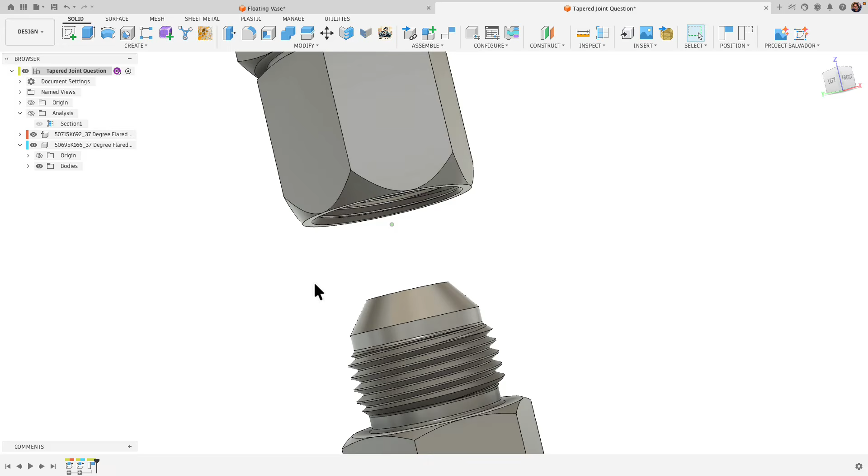I wanted to do a follow-up video on the last tutorial I did on aligning chamfered faces because I got some really good comments there and suggestions on alternative ways to go about it. So I wanted to try those methods here that were mentioned in the comments.

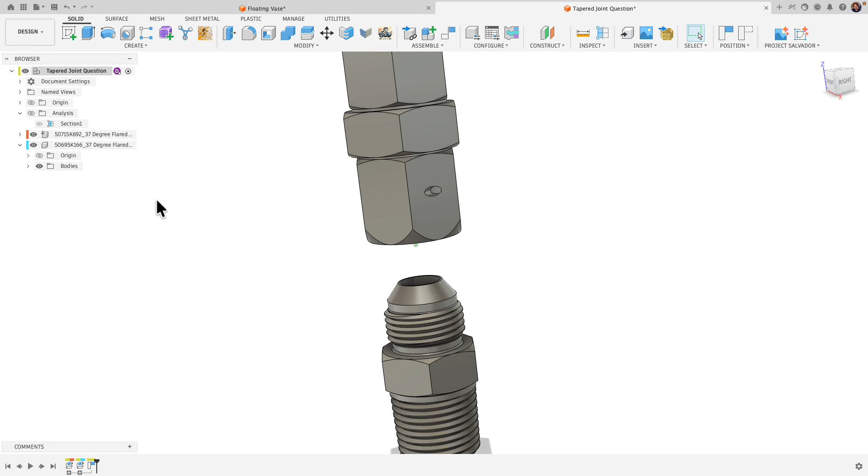So just a quick summary, I've got these two fittings here. They're hydraulic fittings. And I want to be able to align them so that this chamfered face here will come in and connect to this one. So once they're threaded, to give me the exact distance these come in contact.

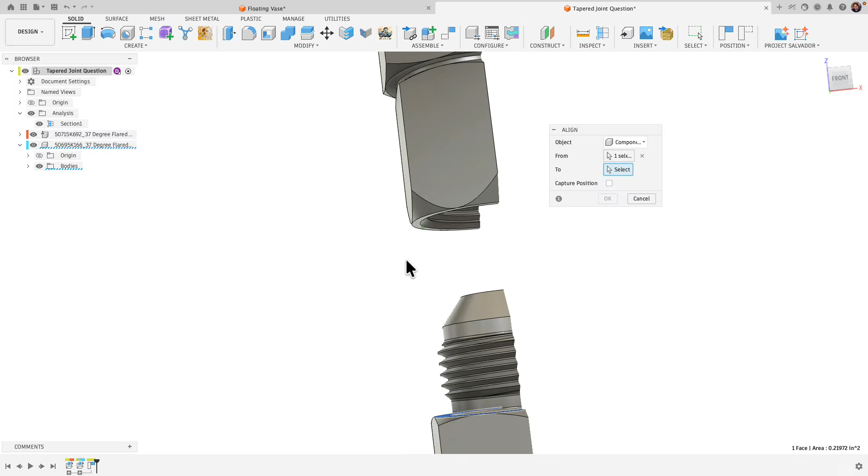So it may seem like a simple problem, and normally it is if you have flat faces, because if I go to modify align, I can take, for example, this flat face and connect it to this flat face. And then boom, you're done. But it's a problem with these chamfered faces because if I try to do that same alignment tool, one, if I go to select it, you can see I've got multiple selection points. I could do the bottom, the middle, or the top, depending what I want to reference.

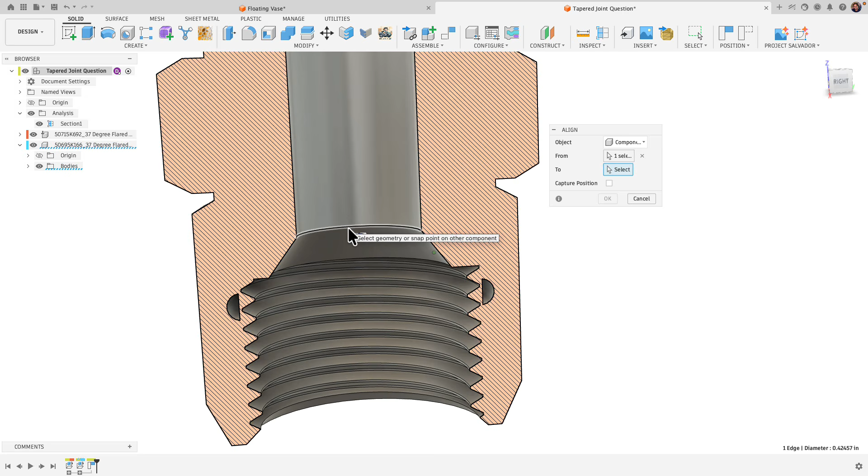But no matter which one I choose, for example, I'll do the top to the top of this chamfer here, click OK. You can see we get an overlap there. So it doesn't align it face to face. It wants to align it to either match this bottom edge, the top edge, or the middle. So it doesn't really work out that way.

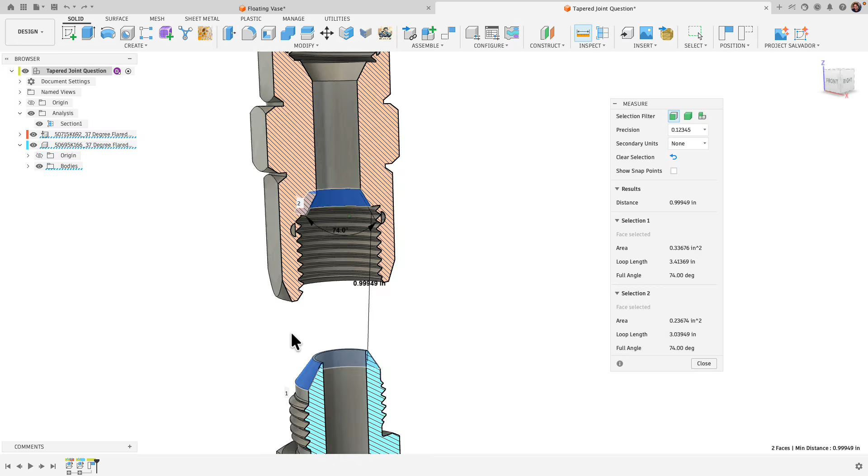And if I grab my inspect tool and try to measure between these two faces here and get a measurement and then move it, the problem is Fusion gives you a distance that goes from the top edge to the bottom edge, and it's also an angled distance, so it doesn't really help. All right, so just a quick recap of the problem there.

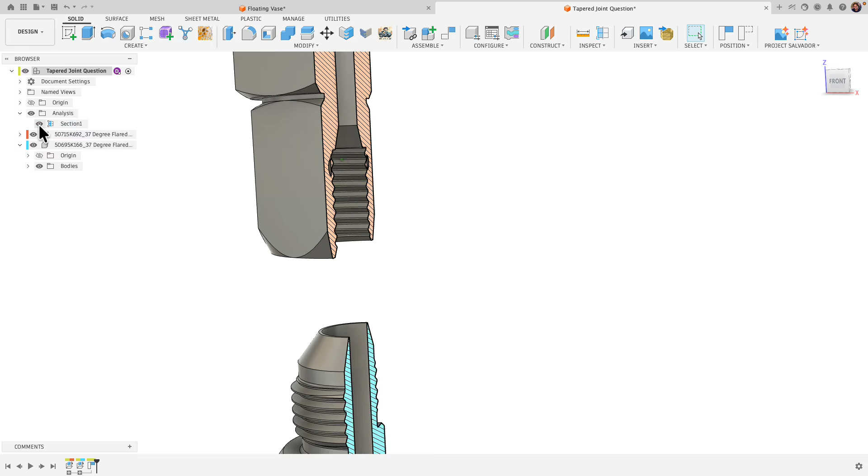If you look in my previous video, I show how you can use the contact sets tool in Fusion that allows you to move both components, and Fusion will automatically stop them once there's a collision, so you can get that perfect alignment that you need. All right, so now with this video, I wanted to address a few of the comments there. So a couple of them that I wanted to look at.

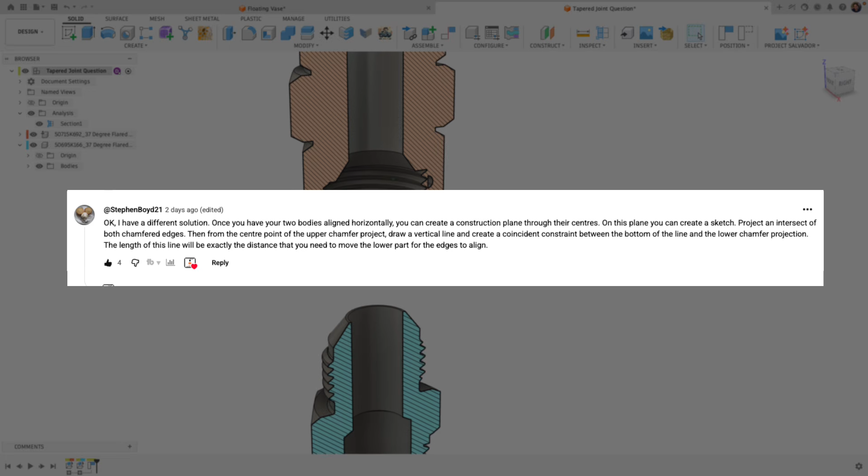The first one is by Stephen Boyd 21, who has a really good solution here. And it's one of those that once I read it, it's kind of like, wait, why didn't I think of that? So with this solution, Stephen basically says, align the bodies horizontally and then create a construction plane, do a project intersect, and then project the chamfered edges, and then you can measure the distance. So let's go ahead and give that a shot here.

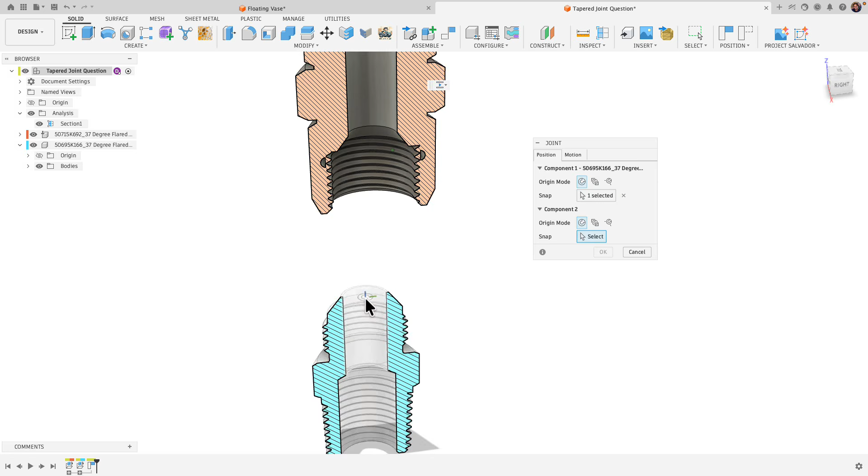So basically the first thing we need to do is align these to be vertical. A couple ways we can do that. We can either do a joint or a constrained components. In this case, I'll just go ahead and do a joint. Let's do a slider joint, and I'll just say center of this cylinder to the center of this one. Just referencing those edges, click OK.

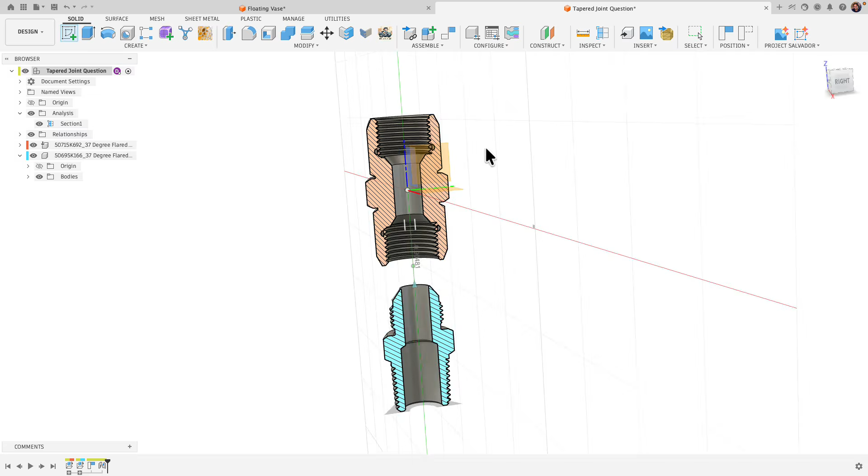And now that's perfectly aligned. I can move that up and down. Where I move it doesn't matter. So right now I'm just gonna pick a position and then take a measurement. To do that, I'm gonna follow Stephen's steps here. I'm gonna create a sketch. I'm on the right plane here. So let's go ahead and choose that plane, capture position.

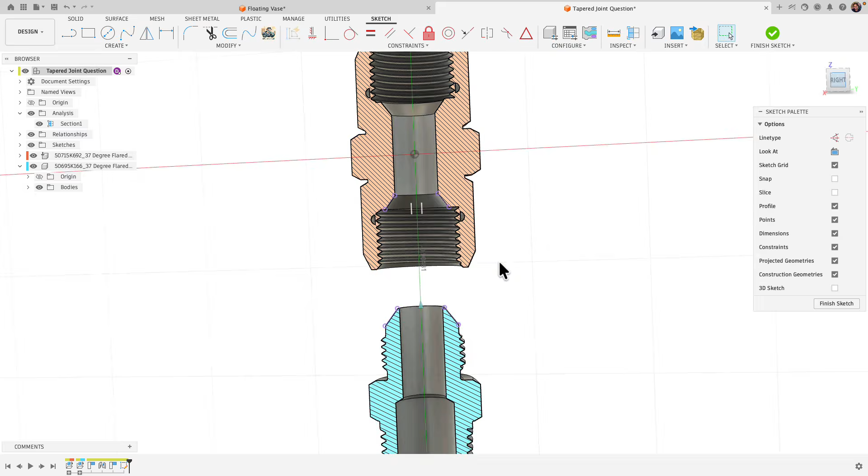And in here, we're gonna go create, project, include, intersect. And I'm just gonna choose these chamfered faces here and click this one and this one here. And note that in my dialog box, I have selection filters set to specified entities. Click OK. All right, let's go to the right view. I'm going to untoggle the bodies here, and I end up with these projections.

All right, so he says go ahead and create a line. So L for line. I'm going to go from what he suggested was the midpoint there. Go straight down and then grab a coincident constraint. Click it on the end of that line and then the projected edge there. And then go ahead and take this measurement here. In this case, I have 1.00628. Click to copy it, close.

All right, so what I got to this point, a couple of things I was thinking about was, well, why does this have to be the midpoint? Because he specifically mentioned midpoint. And I think he was just making sure that when you do select a point here and you go straight down, you'll actually be able to hit this bottom chamfered projected line there.

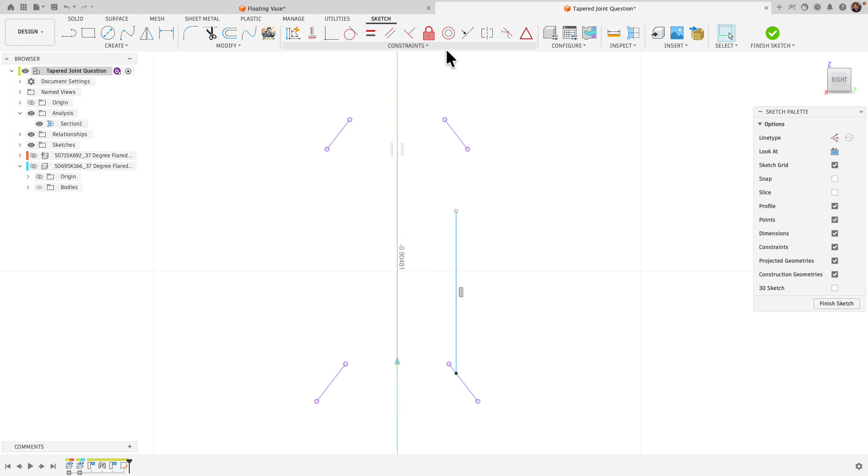Because if I delete the midpoint, and I have this line here, I can just create another coincident constraint here between the endpoint of this vertical line to the chamfered projection there. And no matter where I move this up or down, I could in fact go away from the line, because that coincident constraint will still pretend that line actually keeps going. And you can see here, if I go ahead and measure that line, it's going to be that same distance. So I just wanted to show that really you just need this to be coincident to both lines.

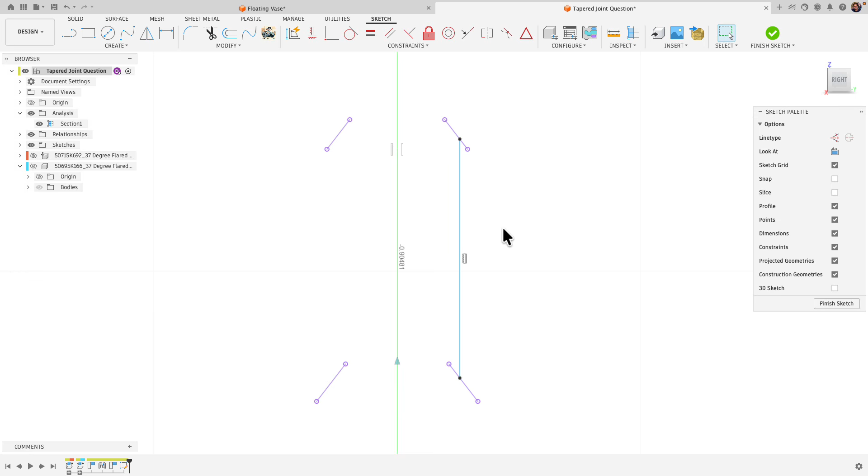All right, we've got that measurement copied to our clipboard. We're going to click Finish Sketch, and then I'm going to bring in these components here, and let's go ahead and do a move. So right click, move copy. I'm going to click on this bottom component, and then I'm just going to paste it in the Z direction, and then click OK. See that 1.00628, zoom in, perfect alignment there.

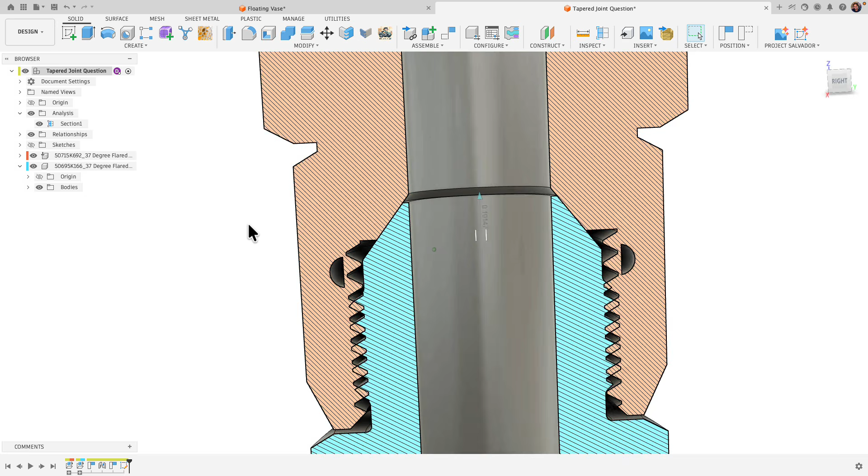And then we can take a measurement from flat surfaces as we did last time here. So click on inspect, bottom to the top here, distance 0.01229. And just as an aside, you can actually change how many significant figures you get here.

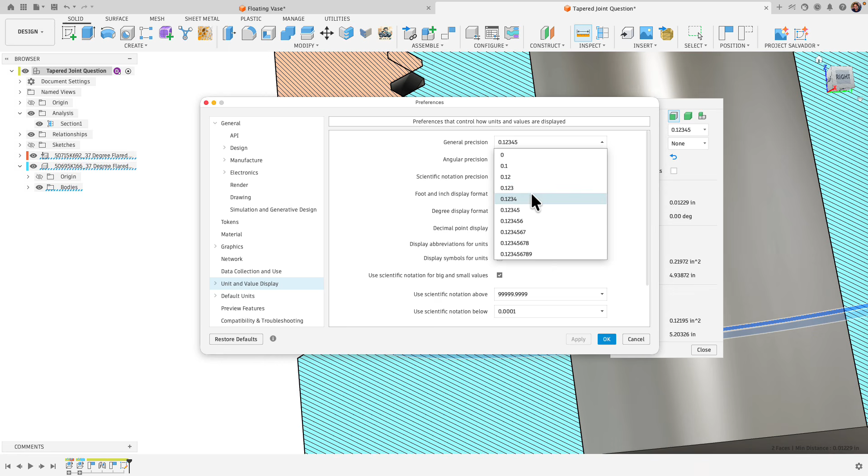If you go up to your preferences, go to your units and value display here, and you can see in your general precision, you can change how many significant figures you want to show. So if I change that to 3, click apply, okay, and let's go ahead and retake that measurement. That will go ahead and display it in the right significant figures you need. All right, just thought I'd show that.

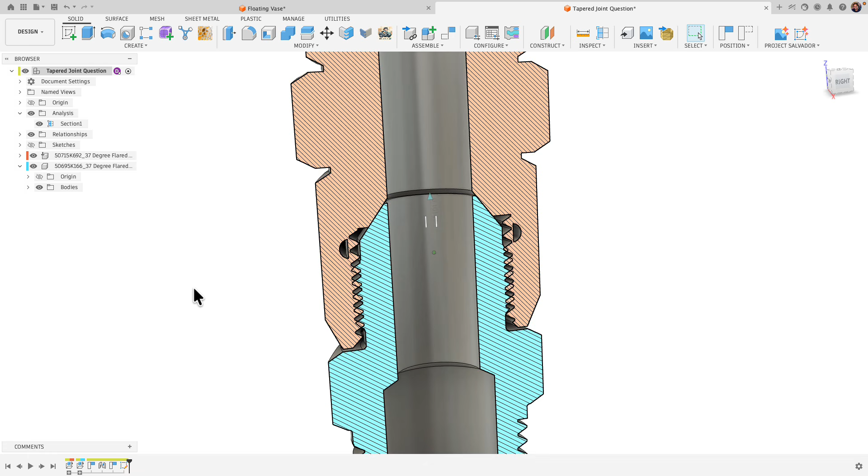All right, so really great solution here by Stephen Boyd. So a big thank you to Stephen for commenting and showing this method that I wasn't even thinking about. Okay, so I'll show another solution here that I thought was also a really good one. And that one was from Kristian Laholm.

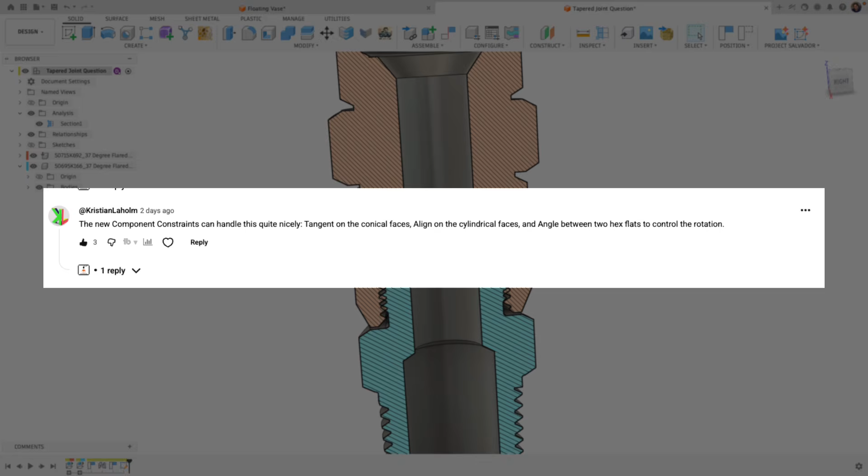So the solution he says here is the new component constraints can handle this quite nicely. Tangents on the conical faces, align on the cylindrical faces, and angle between two hex flats to control the rotation. So let's give that a try. All right, so here he mentions using the constrain components, which is a relatively recent addition that Fusion did that gives you another option to align parts instead of having to only rely on joints.

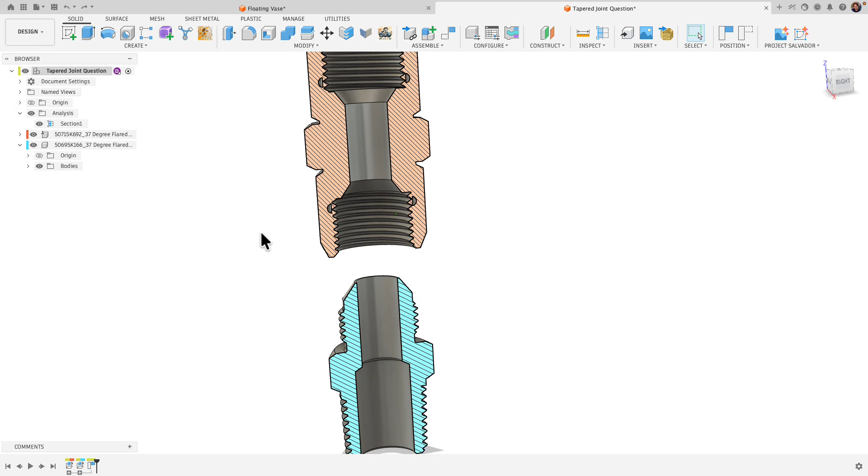So I'm going to go ahead and just delete the last couple timeline features here. So we have this now freely moving, no joints applied. And let's give this a shot. So the first thing he suggests is go to assemble, constrain components, and he says tangent on conical faces. So if we open our dialog box here, we have align, angle, center, and tangent.

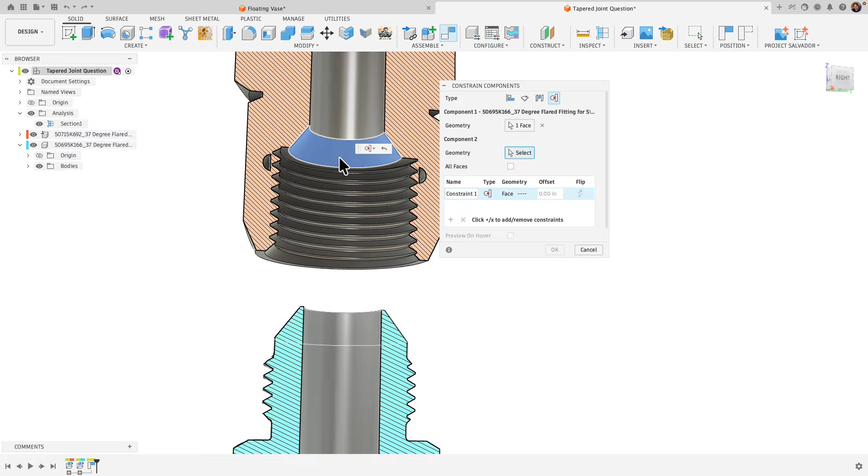I'm going to click tangent, grab the conical faces here, one, and then the inside one here. And all right, so it just disappeared on me. And I actually had tried this attempt and it wasn't working for me. I'll show you why it disappeared. If I untoggle analysis here, you can see that it moved away from that section plane. But we get this weird situation here where this is moving.

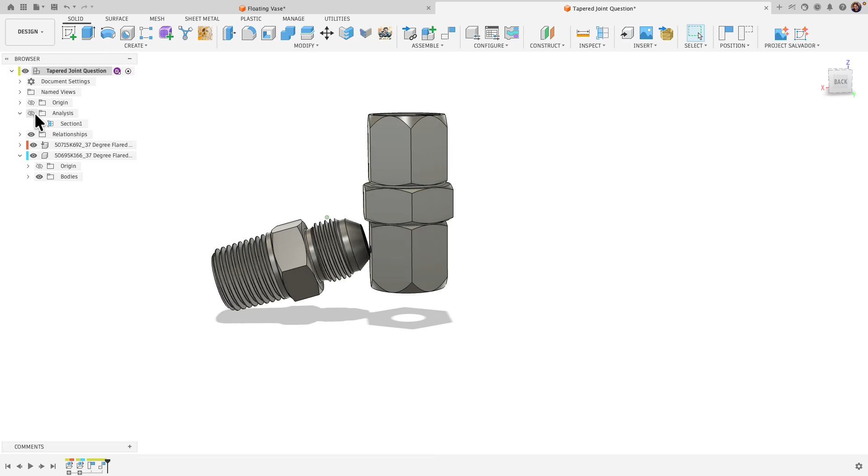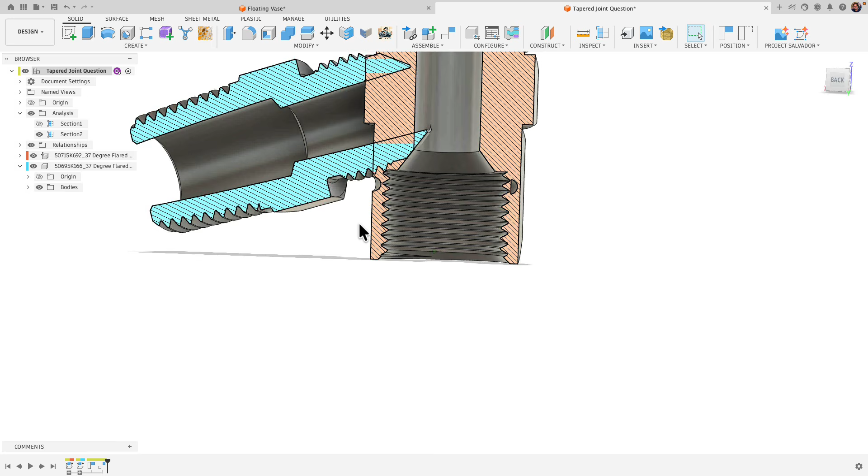I can't see it from this view, so I'm gonna have to create a new section plane here so we can see it. So let's go ahead and go to inspect, section analysis. Let's choose this plane here. Click OK, and you can see what it's trying to do is it is aligning it, but it's aligning the outside of the faces. So if you follow this face here, it's trying to align it to the outside of this chamfered face here.

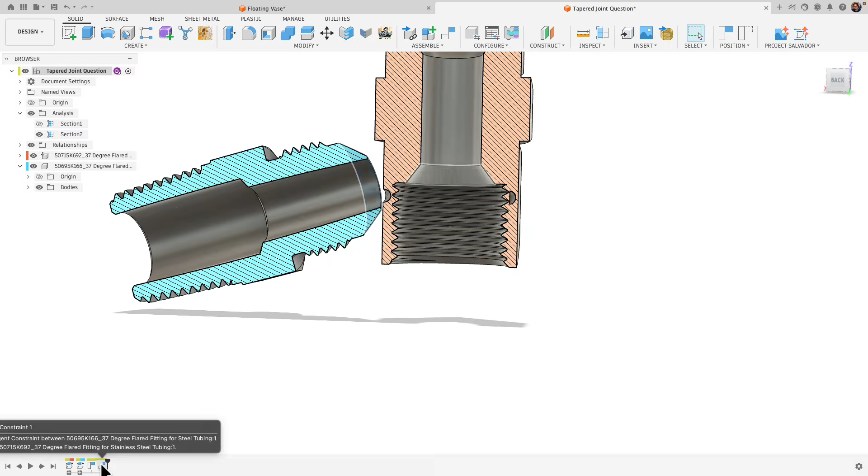And so I did get stuck on this and I wasn't able to get it to work. And I was about to write Kristian back and say, can you explain this? Because it's not working for me. But then I realized if you open this dialog box here, you have an option to flip the edge here. So if you hover over it, it says flips the orientation of the selected geometry.

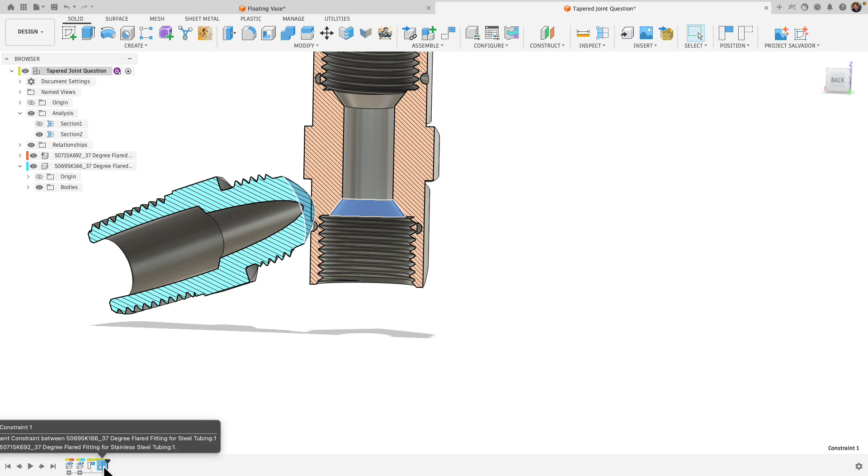So if I click to flip it and then click OK, that doesn't quite work. It flips back. I kept playing around with it and I realized order of operations is important here. So let me delete that. Let me just go back to where we kind of started. So I'm undoing, go back to here. This is not constrained at all, it freely moves.

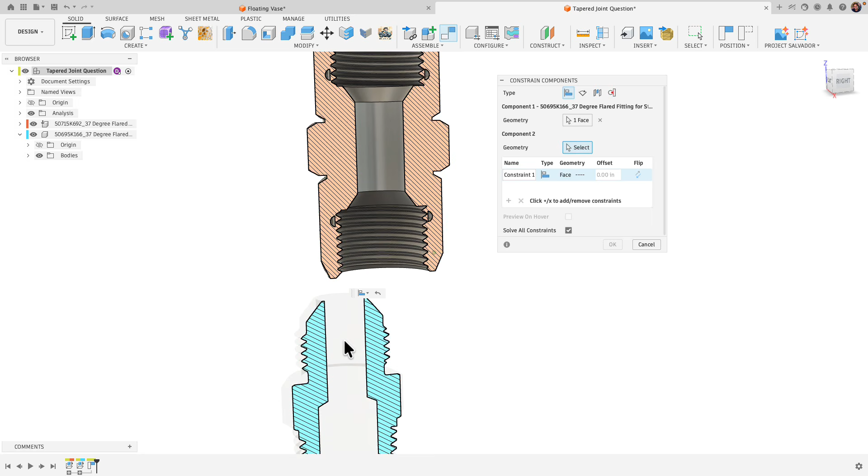Let's go back to assemble, constraint components. And first I'm gonna start with an alignment here. So we're gonna do a vertical alignment. I'm gonna click on this interior face here of the cylinder and align it to the top component. Click OK. Now you can see that has a similar effect as when I put that slider joint. So this is constrained to move straight up and down in the central z-axis here.

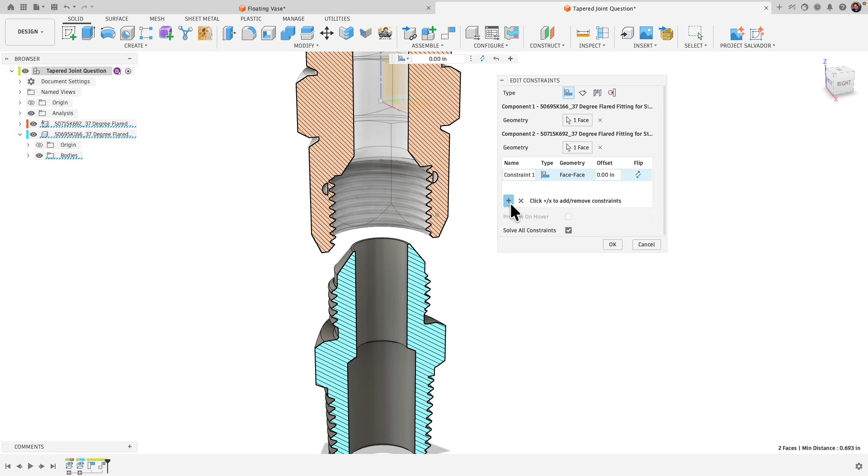Okay, we're gonna open up that timeline feature. So here, be careful, you don't have to go back and do a new constraint components and add another feature to your timeline, you can just open up the existing one from your timeline and then click the plus sign to add another constraint. Because the way constraint components work is that you basically add these constraints to start limiting the degrees of freedom here.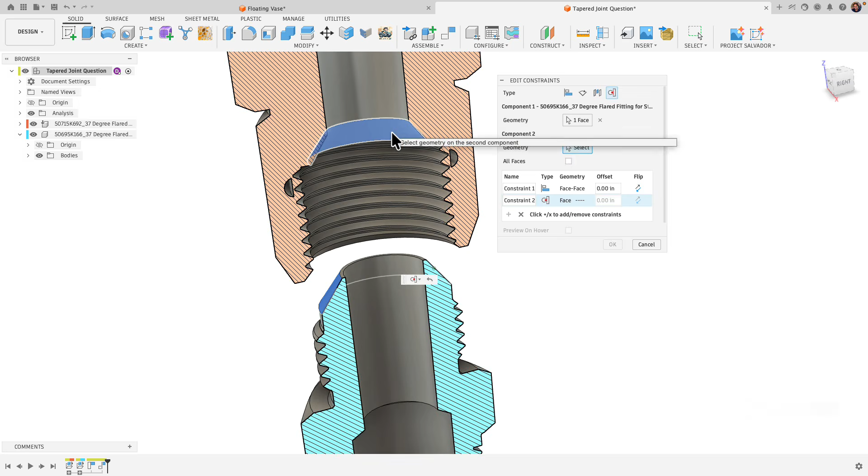Now for the second constraint here, I am going to do the tangent constraint. So I'll click on it, click on the chamfered face here, and now click on the top one as well. And here's another part I was getting stuck. So you can see there I got an error. It doesn't let you click OK, but it goes back to that flip option because it's trying to create that same constraint it was doing before, but it's unable to do it because it can't move the part to align it to the outside of the chamfered face here.

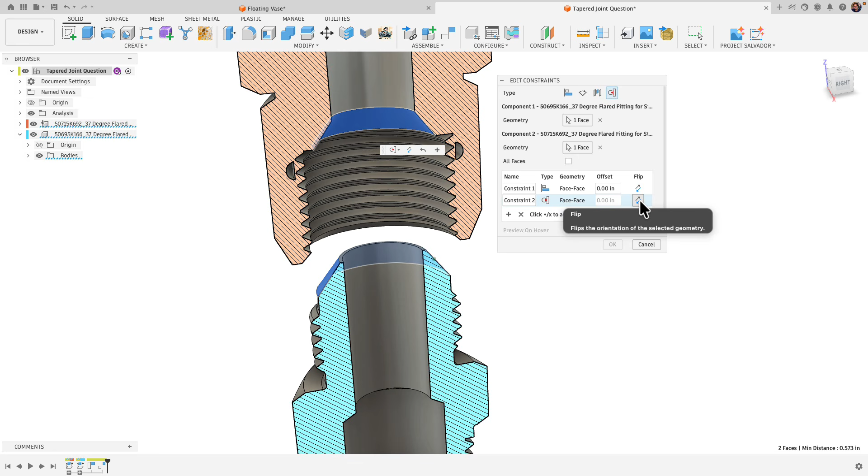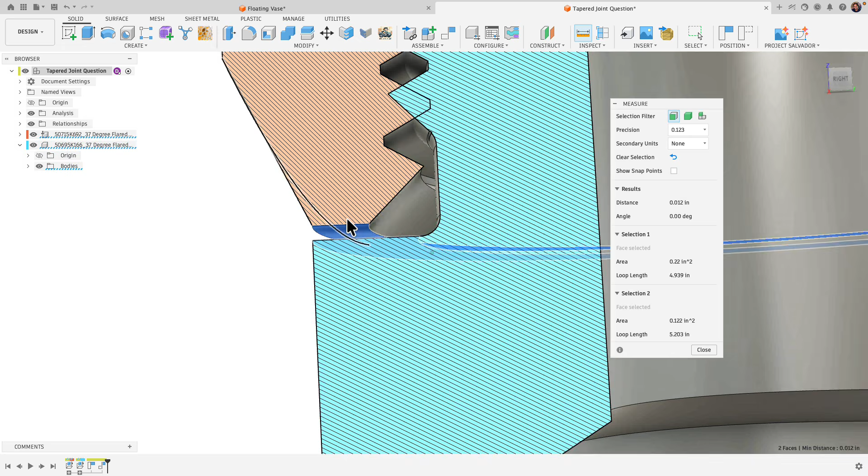So all you have to do again is just click flip, and then that allows it to work. And you can see there now we have those two constraints, the align and the tangent constraint. Visually we can see it looks like it's working. But we can go ahead and take that measurement, and let's just measure from the bottom of this flat to the top of that flat, and we got that 0.012 inch distance. So perfect.

The other cool thing with this option here is if you wanted to align the threads here, you can just start rotating this because we didn't lock the rotational constraint. So we can just rotate that. If I uncheck analysis, you can see what I'm doing here, and it's just spinning it to align the threads if you want to do that.

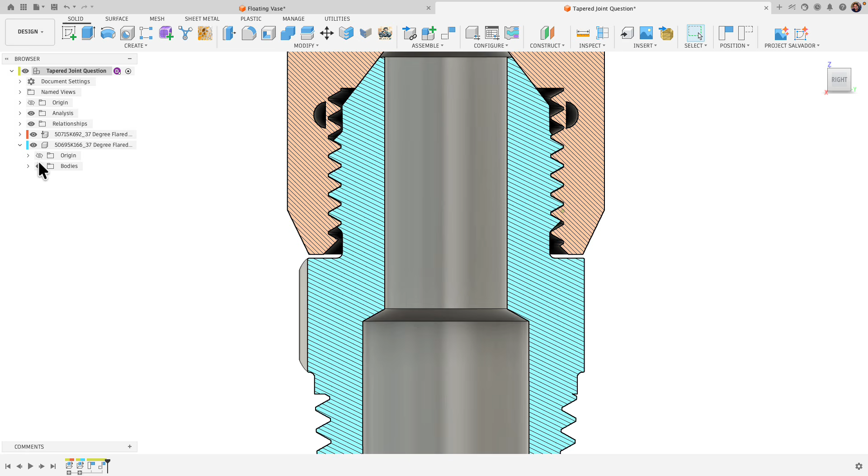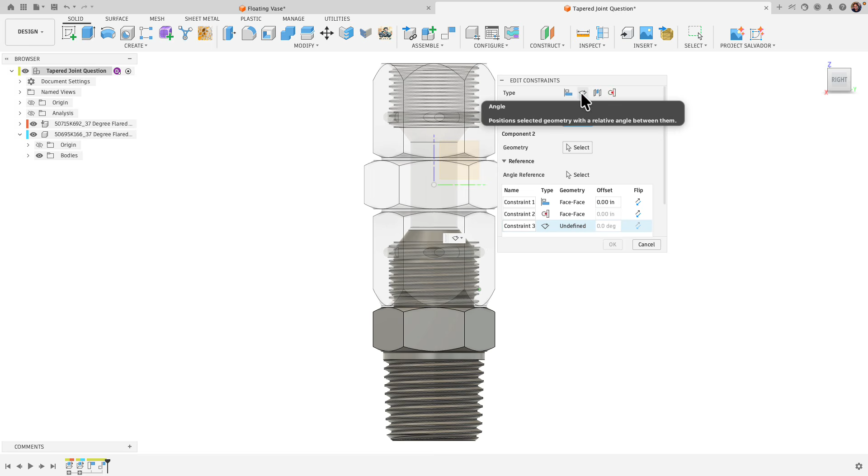And as Christian mentioned, we can also lock that in place by going back to our constraint components. We can add an angle constraint here. Again, here you have to be careful with the order you do things. So first you want to click on the plus sign telling it you want to add another constraint, and this time we're going to go angle. And we can just say lock these two faces together in whatever angle you want. You can paste that angle in here and then click OK.

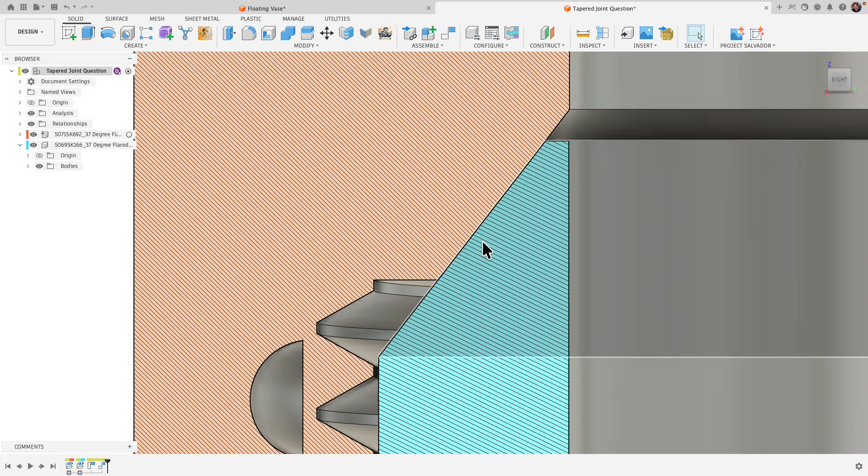And now it's fully constrained. We can't move it up and down, side to side, and we can't rotate it. So you can see that analysis still shows that perfect alignment here. All right, so that is it. I wanted to show both approaches.